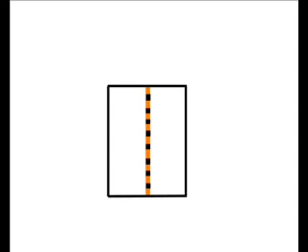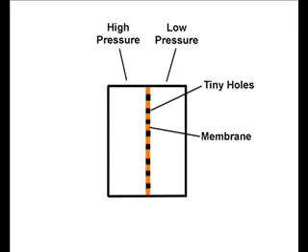At the heart of any reverse osmosis system is the reverse osmosis membrane. It divides a canister or area into two different pressure zones. You have a differential pressure about the semi-permeable membrane. This membrane has very tiny holes. These holes are so small that except for water and a few of the gases such as hydrogen sulfide, nothing much will transfer to the other side.

So as we increase pressure on the water in the intake side, we will push water and very few gases to the other side. Hydrogen sulfide is one of the gases that will move over. So if you're looking for a reverse osmosis system to fix your sulfur water problem, you'll have to look elsewhere. It can't solve that particular problem, but it can solve calcium problems.

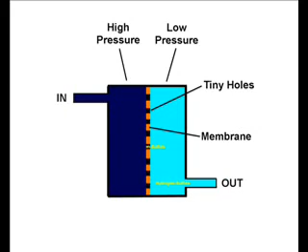It can solve salt problems. It can solve many other problems, iron problems, and other contaminants that are much larger. So if you were to put a great deal of this water that has the contaminants through the membrane, you would result in building up increasing concentrations of these contaminants as the water was cleaned and pushed over to the low pressure side.

The industry uses a term for this highly concentrated water. They call it brine. And we need some way of getting this brine out of the high pressure side, else we would eventually clog and foul the membrane.

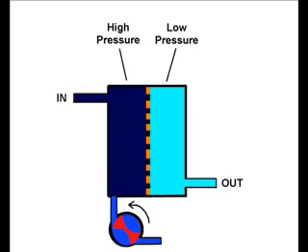So this is often done by a valve or some sort of a weep. Here in this illustration I show using a little valve, and what this little valve does is it rotates and holds that differential pressure for a period of time, kind of steps through there, if you will. So if we need that differential pressure to be maintained in order to push the water through, we hold it and then we dump it, and then we hold it and we dump it, and as we do this, we repeat the process. We dump out that concentrated water that has those contaminants in it, and in this way the free-floating contaminants are washed out.

Now when you have a reverse osmosis system, it's very important that you have your air gap or break in such a way that you cannot back siphon nasty germ-filled drain water into your filter system.

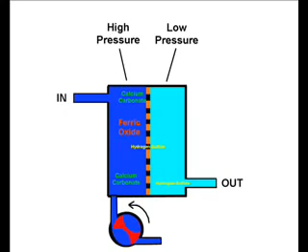If you were to go to your local home improvement center and buy a residential under-the-counter RO system, you'd likely see 3 containers or 3 jars. We've already discussed the center compartment, which is the RO compartment, but ahead of that, or in the lead position, is usually a pre-filter and carbon filter combination.

Now what it does is, first, the pre-filter is used to mechanically screen large particulates to protect the membrane from the large matter, and then the carbon is used to take out any residual chlorine, because chlorine will affect the membrane. It will just destroy it. It'll eat it up. So that's usually in the lead position.

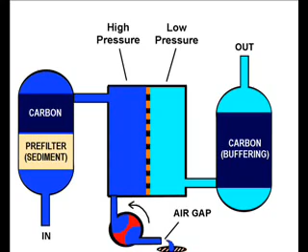Also, you'll normally have a tank, a small pressure tank for storage. Usually they're about a gallon, maybe a gallon and a half, or maybe even 3/4 gallons, something like that. And you'll also have, as an option, and most of them will have this, a third canister, which will be just a pure carbon filter for buffering.

Performance modifications. Let's first look at what we can do on the low side, or the permeate side. These units normally come with a small storage tank, usually done so that they can fit under the sink.

If your rate of generation is sufficient, many times we find that we just simply don't have enough storage, because the way we use our water is only during breakfast, lunch, dinner, that sort of thing. We're drawing it down in small volumes over very narrow points of time. That gives our system an ability to recoup over time.

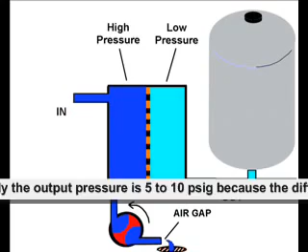But what if we don't have that situation and we have bigger demand? Maybe our 24-hour demand is such that we still have enough being generated, we're just drawing too much. Well, using a larger tank simply allows us to store more overnight and take care of that demand.

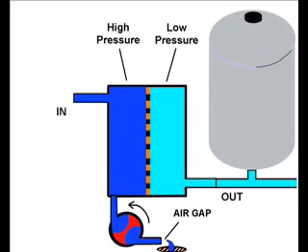Another way we can improve things is by use of what is known as a permeate pump. The way it works is we take the low side pressure and drive it even further down by putting it to the suction side of a water-driven pump. We drive the delivery side, or system side, up much higher, so we actually have a better delivery pressure at the sink, and we do it all by using the brine as the driving force.

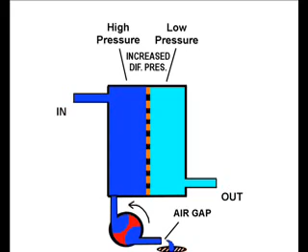High side modifications to increase production. If increased differential pressure is the goal to increase production, then the easiest way we can do it is by providing a low volume, high pressure pump on the input.

Remember, we're not actually generating much water in a 24-hour period, or even in a 1-minute period, but we do require high pressure. The greater the differential pressure across that membrane, the greater the output will be.

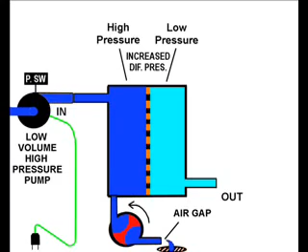Well, what can we do then? Can we add the low side modifications as well? Certainly we can. The number one low side modification that we added was the permeate pump. It actually raised the delivery pressure as well, which gave us tremendous benefits at the sink.

Also, the high volume storage tank adds a great deal to our project as well. The permeate pump also drops the low side pressure on the RO module. So what have we net done? We've dropped that low side very, very low, and we've raised the high side very high.

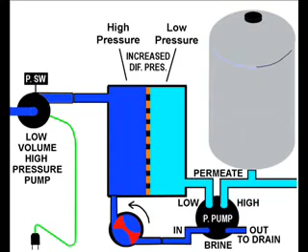And controlling this unit is simple. As long as we don't exceed the maximum working pressure of our under-the-counter system, we can even recycle the little 1-gallon tank, and we can use a low side pressure switch to drive that little baby pump.

In short, we can operate a rail throughout the house, say at 30 psi, off that low side switch, letting the little pump run off its built-in pressure switch at say 100 to 80 psi, whatever it's designed to do, assuming it's compatible with the rest of our system's working pressure. It will pump up the little orange tank and cut off, and then that pressure will push against that membrane and it will cycle through until such time as we fill up our little gray tank.

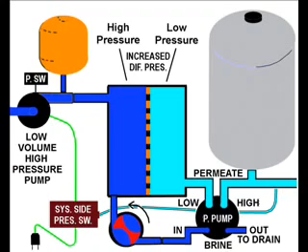And when our little gray tank gets filled up to 30 psi, our rail reaches cutoff, the system cuts off, and we stay that way until we've used enough water out of our supply tank to require regeneration.